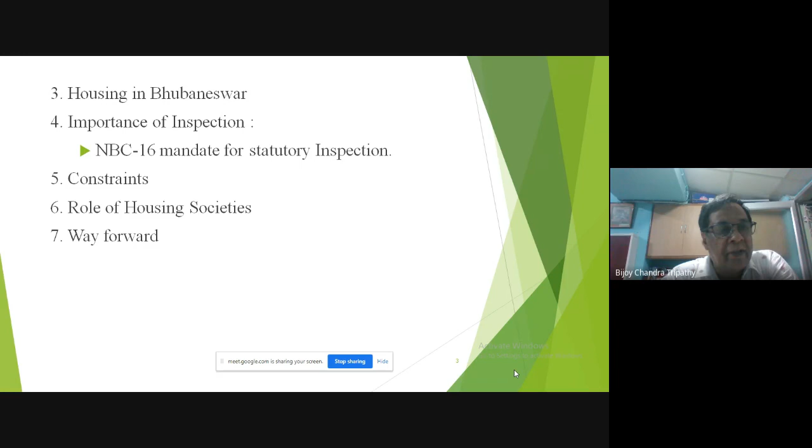We'll go one by one through the concept of the smart city and the strategy. My sequence is like this: the challenges, importance, need, features, aim, strategy, and implementation. Then we'll come to Bhubaneswar Smart City Limited, its broad coverage, board and institution. Next, housing in Bhubaneswar, importance of inspection, constraints, role of societies, and way forward.

As per the mission statement, smart cities are cities that work. Here both push and pull factors work - people who don't have opportunities come here, and people who think there are opportunities also come here, so it's a both-way process. The needs of people who live in cities are livability, economic ability, and sustainability.

As Mr. Dalai said, urban population is rising, and along with that it is contributing to GDP. So towns, urban areas, cities are the sources of GDP now. In the 2030 scenario, 40% urban population will contribute 75% of GDP. Smart cities are important because this is the first organized step for promoting comprehensive and integrated development of infrastructure - physical, institutional, social, and economic.

Smart cities need smart leadership and vision, understanding the concepts of retrofitting, redevelopment, and greenfield development, because we are developing smart cities out of existing cities. Smart planning is entirely different from the routine DPR concept that we engineers follow in debates. Smart citizens actively participate in governance and reforms - this is the underlying point. We've been talking about stakeholders for whom we are preparing smart cities - it is for the citizens, and citizens must be sensitized enough to live in the smart city, understanding the concepts, strategy, missions, time period, and what is expected from them.

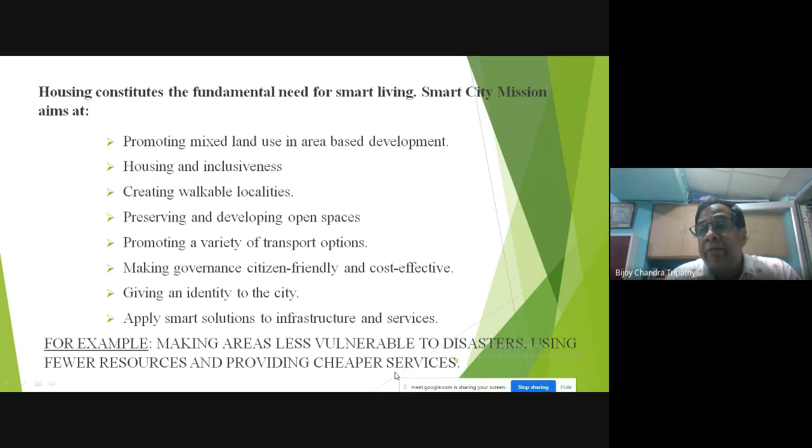For example, making areas less vulnerable to disasters, using fewer resources, and providing cheaper services. We'll be hearing from my colleague Mr. Parhi on the effect of storms on stormwater drainage later on, and there are other disasters which I am going to highlight here. The smart city strategy is to drive economic growth and improve the quality of life.

All these are the mission statements; I have only borrowed from their statements. Retrofit the existing areas, including slums, so that they contribute to smart city development. Develop greenfield areas - there are other areas where we can develop all around the city. The implementation, as has been highlighted earlier, involves area-based development and pan-city development.

Now coming back to Bhubaneswar Smart City Limited, the area-based development, which was referred to by Mr. Dalai, is focused on Janpath, that is 985 acres, BBSR Town Center District, BTCD.

Then development of Intelligent City Operations and Management Center, IOMC, or the Pan City Tech Intervention, which covers the whole city. Social equity and capacity building projects in the selected BTCD area. Among other facilities, the Pan City proposal includes city service, water, waste and energy, traffic management, emergency response incident management, plug-in services, fiber optic cable, and Wi-Fi access points.

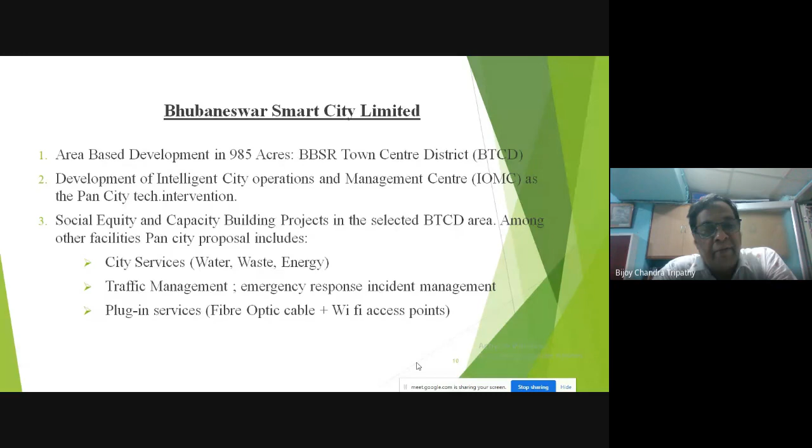Now we'll come to our topic. Against the backdrop of smart city, we look at the housing scenario because smart cities need smart citizens, and smart citizens live in different houses. What are the categories of housing facilities in Bhubaneswar?

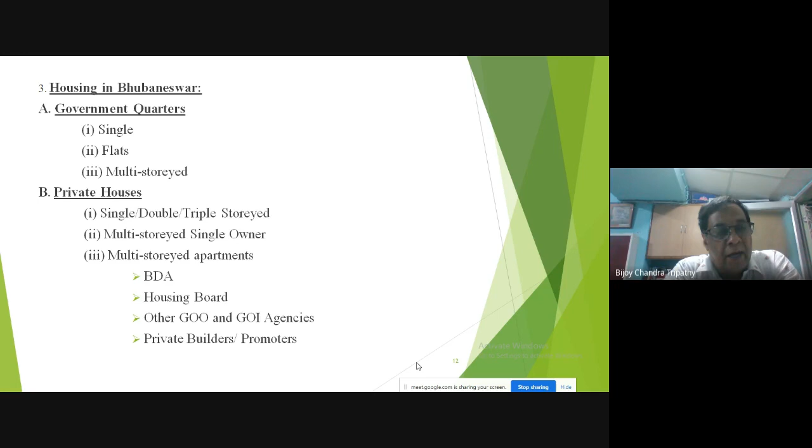Apart from the slums, different slums, we have organized housing through government quarters, single flats or multi-story, private houses - single, double, duplex, whatever it is called, triple story, multi-story, single owner, multi-story apartments. Some of them are built by government agencies and some by private builders and promoters.

From the 1950s onwards, it was mostly government housing. From the 1990s onwards, mostly private multi-story apartments. Earlier, from the 1990s to 2010, we had ground plus six, seven stories maximum, and then the rules changed, and we had buildings of 15 to 20 stories.

This came up with Cosmopolis, with builders and others. Regulatory authorities include BDA, the Apex one, BMC the municipal services, OSPCB for environmental protection, groundwater board, fire department, Government of Odisha for fire safety and life safety, AAI for airport funnel zone, ASI for heritage zone, and WRD for natural drainage.

That is a very important one, and I think my colleague Mr. Parhi will touch upon this. As I gather from my colleague, the town planner Mr. Namani, there are 107 private multi-story apartments existing now, apart from the ones which have been approved recently.

They resumed approving after the RERA rules in 2020. I attended a couple of meetings in BDA at that time also, and there are government apartments, multi-story, numbering 17.

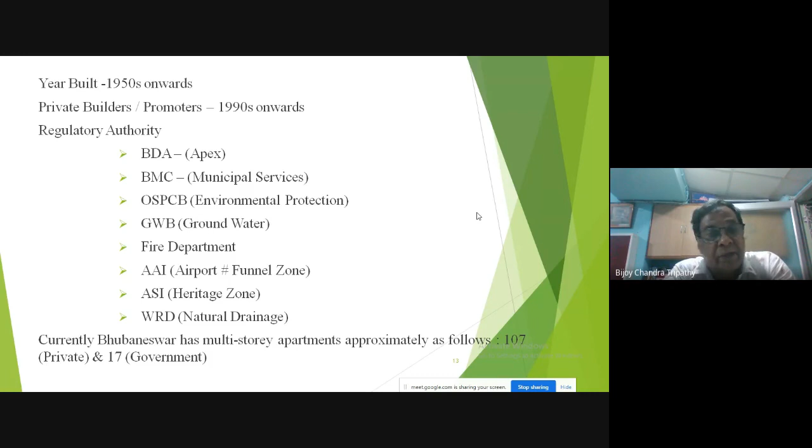And now, why it is important - the topic which I have selected is the importance and necessity of regular inspection for safety: structural safety, fire safety, and other life safety.

The National Building Code was revised in 2005, emphasizing an integrated approach to planning and administration, a multidisciplinary approach. It has been further refined in its latest version, 2016. Safety provisions have been modified and updated as per the respective revised codes, because there are material codes, structural codes, administration codes, and fire safety codes, and all have been revised.

So these codes have been incorporated. Apartments which are not built in conformity to these are at the highest risk. Bhubaneswar, as we know, is in earthquake zone 3, and earthquake is unpredictable, and soft, open ground floors are most vulnerable. So also apartments constructed on filled-up soils without deep foundation.

I am writing this because I have personal experience, as I have grown with the city and have been involved in my honorary capacity as a structural engineer in some of the construction that came up. Out of my own interest, I saw it from the 1990s, as Bhubaneswar faced the impacts of the super cyclone in 1999, ripping through buildings. Non-structural components were damaged heavily, and structural components were also damaged.

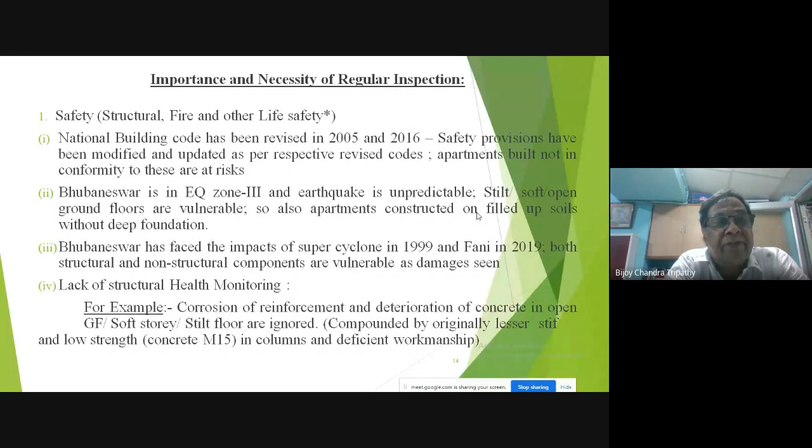Our population is at risk, and that is the urgency of the matter. I am trying to put it across the board for consideration. Next, please. Nita, next, please.

Modification by individual apartment owners - as they have lived there for 10 years, 20 years, they have been modifying things. RCC structural members have been tampered with, cut by electrical and plumbing work or for refurbishing purposes without consideration of the structural aspects, stability aspects, updated codes, and floors have been redone over existing floors.

What will happen if you put grouting and put a floor over the existing floor? It will add to the weight. It will add to the gravity load and the component of lateral load due to the earthquake component.

Additional partitions, wall additions on cantilevers - this is a risky thing. The cantilever balconies are the most vulnerable, with many times more seismic coefficient, and they are adding walls, adding loads there on the edge.

Then modification of occupancy - residences were designed originally, and they are changing them to hospitals. I have got one such example in Sunshine Hospital, which was originally, I remember, part commercial in 2 floors, and now the entire thing is a hospital, and huge loading has been done over there.

Unauthorized penthouse construction on terraces by the builders themselves - promoters who have violated the laws. One of the main things you see is fire fighting fire escape routes blocked, non-provision and non-functioning of the firefighting facilities as per norms, non-existing refuge or assembly areas, non-practice of mock drills, and obsolete and unsafe electrical installations.

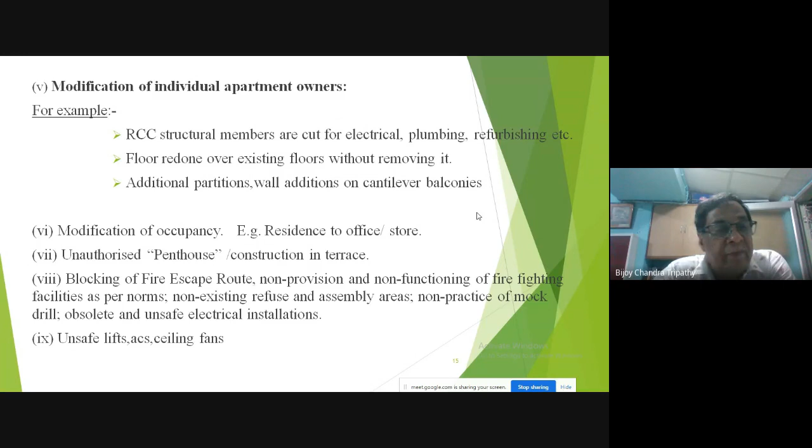The window air conditioners will be running for more than 8 hours in the night because of summer, and it is risky. One person is vulnerable, and the entire flats, the entire apartment, become vulnerable - unsafe lifts, air conditioning, and ceiling fans. Next, please.

Sustainability, yes - the second point, why it is important. Obsolete electrical installations - now we are advocating for energy efficiency, energy efficient installations, and energy efficient pumps and motors. Non-use of non-conventional energy - nowadays we are making it mandatory to have a certain percentage of solar and other non-conventional energy, and this was not used then.

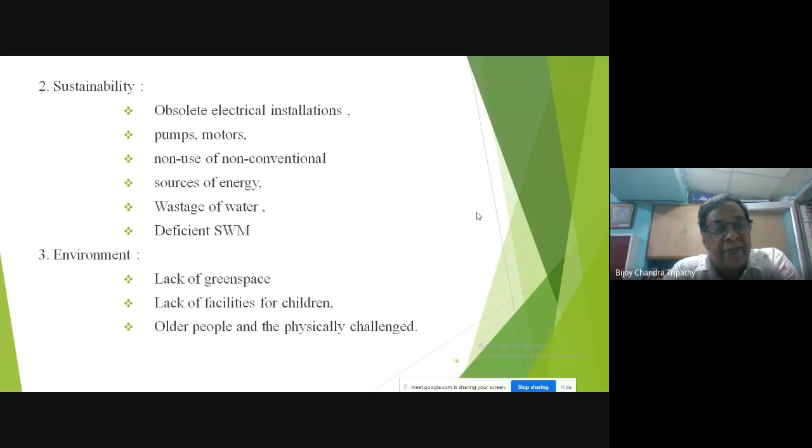So when we are talking about smart city and sustainable architecture, we have to retrofit for sustainable energy as well, and address wastage of water and efficient solid waste management. The Bhubaneswar Municipal Corporation has taken adequate steps and introduced door-to-door collection, but in housing societies things need to be streamlined - that is not done. Environment-wise, there is a lack of green space, lack of facilities for children, older people, and physically challenged.

Next, please. What is the mandate of NBC 16, which is supposed to be enforced by the development authorities? Part 14.4, periodic occupancy renewal - buildings more than 15 meters in height must be subjected to periodic physical inspection by a team of multidisciplinary professionals of the local authority.

In this case, we are talking about BDA. The period of inspection shall not exceed 5 years. Professionals can be outsourced also. Inspection includes, among other components, structural audit, fire and life safety audit.

Now the most important point comes on the next page. NBC mandate part 2 continued. Unsafe buildings: by such inspection, they identify all unsafe buildings which constitute danger to public safety and shall be restored. Underline this: shall be restored by repairs, or demolished, or dealt with as otherwise directed by the authority.

So if the builder, if the housing society does not do it, BDA has a mandate as per the code. It is not that the law is enacted, it is not there in any regulations, but this is an important facet because life is at risk. We are talking about smart city, and this is supposed to be smart people vulnerable to the condition of the building. Structural health is poor, and this is mandated by the code, and is the recent code.

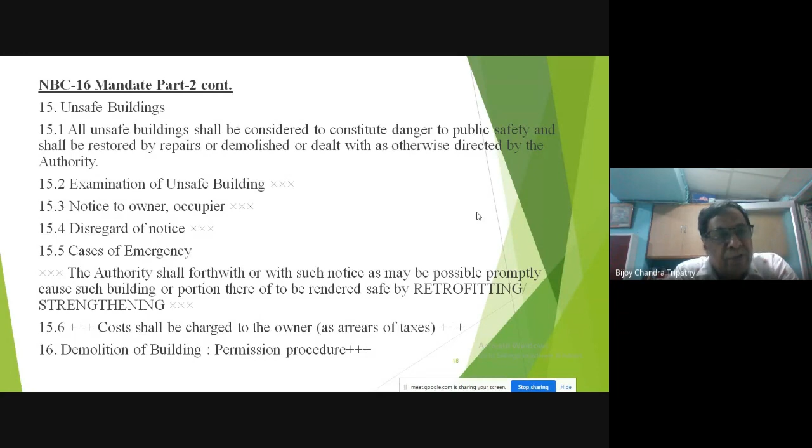Current practice for inspection by BDA - again I got it from BDA. I gathered from my friend, my colleague, Mr. Acharya, who was the architect in BDA, that he used to accompany the team, and that practice has been stopped. But now what is happening, let us see: pre-approval stage, site verification by Amin, field inspector, all of us know that, after application for approval or occupancy is submitted.

Existing building and construction phase: what is happening in case of any complaint by the neighbor or outsider, site verification is taken up related to land or building either by planning or enforcement. If deviation is detected, the applicant is notified as per ODA or BDA regulation. The owner applies for regularization within the rules. After RERA registration, BDA records reduced number of deviation cases.

Bhubaneswar Land Use Intelligence System - this is an IT-enabled service. BLUIS is now set to be in operation for detecting encroachment and inspection over government land from ISRO satellite by ORSAC.

Multidisciplinary inspection is not active now. As I said, structural safety - in BDA's view - is the responsibility of the developer and structural engineer who are certified and engaged for the project. Fire safety is guided by recommendations of the fire prevention wing, and it is on the basis of incident reporting only. And in essence, the safety is the responsibility of the builder.

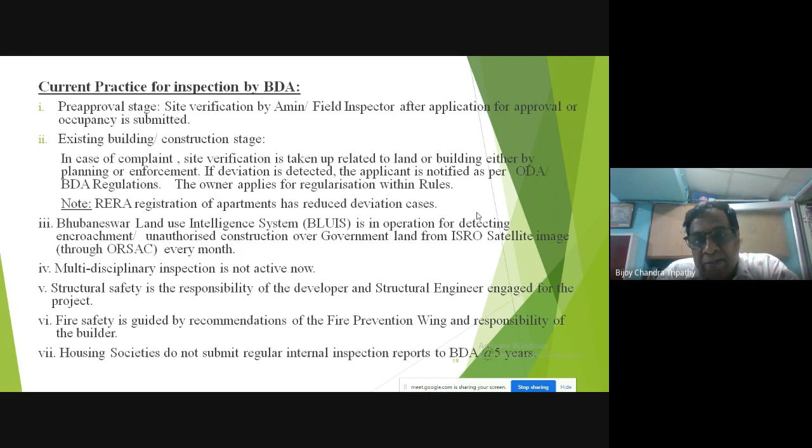Housing societies do not submit regular internal inspection - they do not inspect it. And they just plaster it and paint it if required. And in some cases now it is also exposed, as I said, in most of the stilt floors.

What are the constraints in BDA? BDA does not have its own structural, geotechnical, HVAC, plumbing, and electrical experts for inspection. Housing societies are to take care themselves. Housing societies mostly do not have as-built drawings and records of execution, which is the best document for any kind of special repairs or retrofitting.

Housing societies are mostly concerned with operation and maintenance and routine maintenance. That too, maintenance is mostly taken up in an ad hoc manner, and a plan approach is missing. Housing societies often shirk the action of retrofitting, even in emergency, on the plea of cost and non-cooperation by the members. Level of sensitization is too low.

So we are at peril. The risk continues. Ignoring the problem does not solve the problem - it compounds the problem. And every year, I would say that the rate of deterioration is increasing twice.

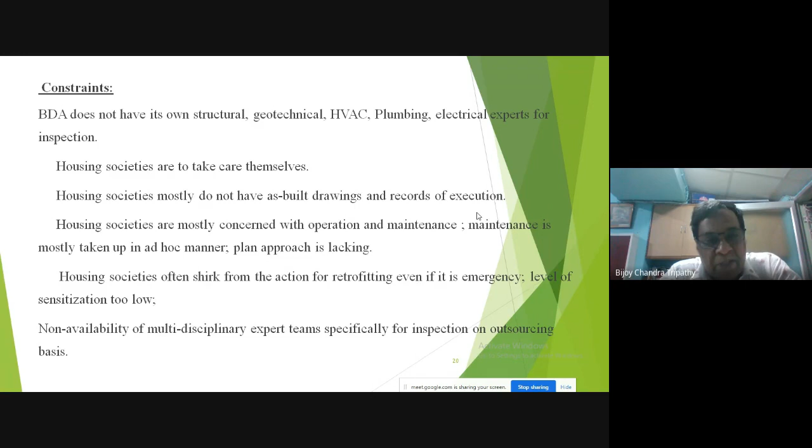Non-availability of multidisciplinary expert teams specifically for inspection on an outsourcing basis - such consultants are not available. Our consultants are there to prepare the DPR, detailed engineering, structural engineering, but a multidisciplinary team for the sake of such kind of inspection has not been advocated, and that is the need now.

Role of housing societies - so now we come to the stakeholders. The main stakeholder in a smart city are the housing societies. Housing societies need to be smart, fully IT-enabled, professionally advised by an in-house team or outsourced team of experts. We have seen in Mumbai, in NRI colonies, such kind of IT-enabled smart housing societies existing. I think 3 to 4 years back, I was there for a couple of weeks on a personal visit.

So I had seen that, interacted. Awareness among individuals on life of structure, structural and non-structural components, do's and don'ts for structural, fire and life safety.

And this third point is very important. We have highlighted awareness on collective failure for an individual's lapses, be it air conditioning, gas leakage, or wastewater, or sensitization of maintenance. That is very important because an individual's lapses compound to total system failure.

So here the sensitization of maintenance staff, the electrician who goes there, must be told about the importance of a column or structure, and he should not cut it. I have seen with my own eyes, I caught it and shouted at him, but he said, no sir, everywhere I have gone, nothing is there. The structure is safe, we plaster it, there is no problem.

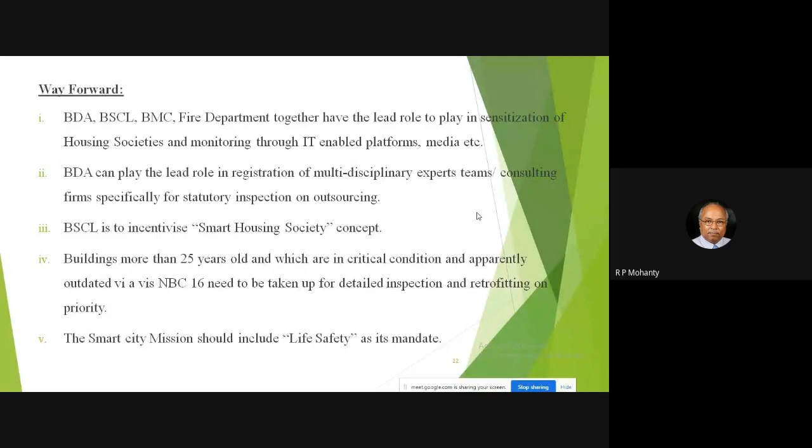Buildings more than 25 years old, and this is most important which comes from our discussion, which are in critical condition and apparently outdated vis-a-vis NBC 16, need to be taken up for detailed inspection on priority. And the smart city mission should include life safety as its mandate.

Thank you very much. And I have along with me some 5-6 research scholars.

Thank you very much, sir, for your excellent presentation on the topic. But I shall just add one line that it is very important for the government to take responsibility for the government buildings at least, for how these buildings can be preserved. But now we observe very little response from the government side, at least for government buildings. Anyway, all the stakeholders have important and equal responsibility. I'm mobilizing a lot of people in different ways.

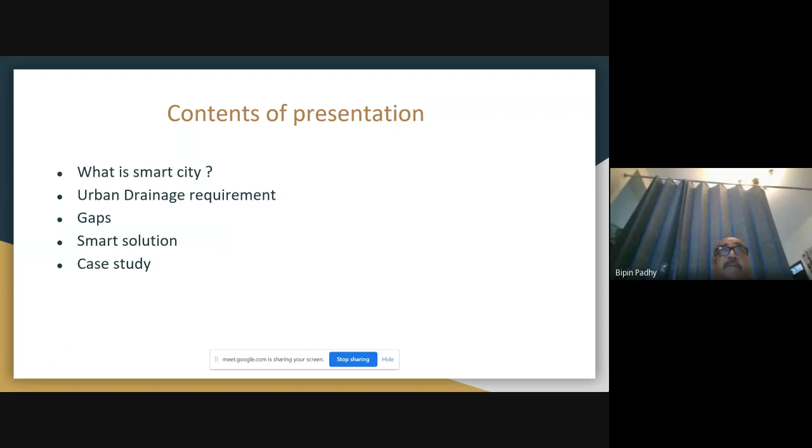If time permits, I may go for Bhubaneswar town. A smart city, of course, is the call of the day, and Mr. Tripathi has already elaborated, and our previous speaker, Dr. Dalai, also has spoken about the smart city requirement - adequate water supply, electricity supply, sanitation, etc. All this gamut of things comes under the smart city category.

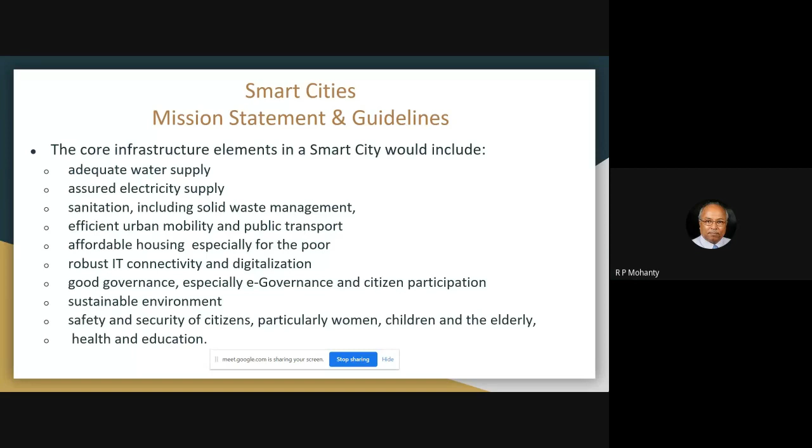Mostly what we perceive, smart city is nothing but digitization. When you go to the parking lot, you find information on your mobile. And when you've got an IBMS system integrated into your building management systems, automatically you are aware of many of the operations. So these are all smart solutions.

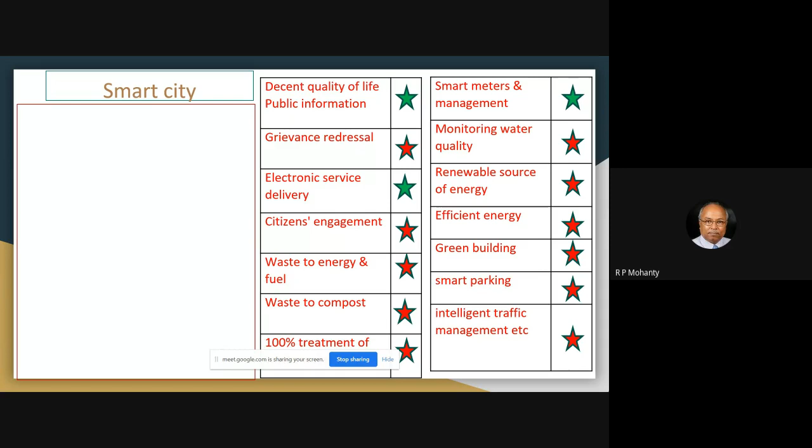Now, what is smart city? It's a decent quality of life, public information, it's a grievance redressal, electronic service delivery - this is all taken from guidelines where it's specified what a smart city should have.

If you see electronic service delivery, citizens engagement, waste to energy and fuel - I had purposefully marked something red and something in green, just to show that many of the things we are having are under development: smart meters and management, monitoring water quality, renewable sources of energy, efficient energy, green building, smart parking. All are there in part of our life, and slowly it is coming in.

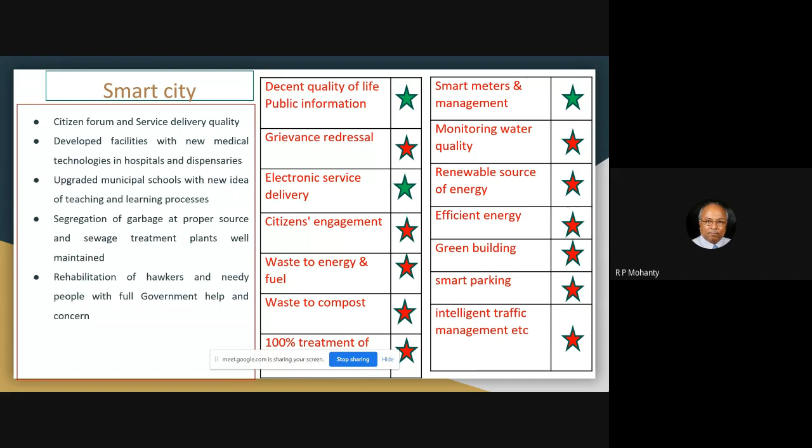Smart city citizen forum and service delivery has developed facilities, segregation of garbage. Let me come down to the last point, which I'll try to go to the topic directly.

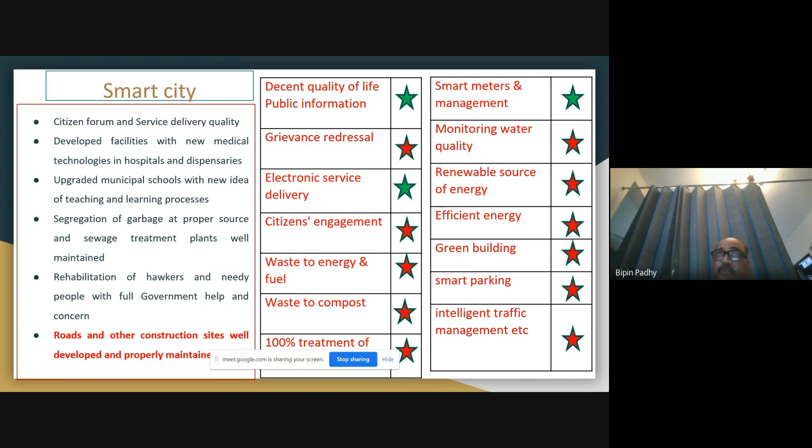Roads and other construction sites should be well developed when seeking smart solutions. If my roads are there and roads are flooding and I'm not able to even move out, that means basic infrastructure is lagging in my city. I need to address them first. That is important. Now coming down to stormwater drainage.

Stormwater drainage is part of the jigsaw puzzle of this particular smart city. In a smart city, if you look into the treatment side, the solid waste management, the wastewater collection, the household collections, and stormwater drainage - these four are part of the entire integrated system of environmental management. If this needs to be here, I can search for smart solutions.

For example, if I'm going for wastewater collection and disposal, I may go for an STP and reuse the water. If I'm going for solid waste management, I may take out compost and reuse this. This means everywhere I'll try to integrate some of these smart solutions. So in the stormwater drainage system also there are some smart solutions.

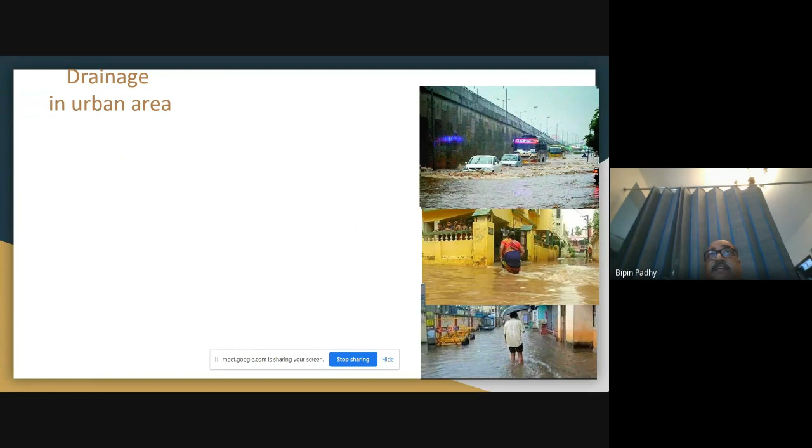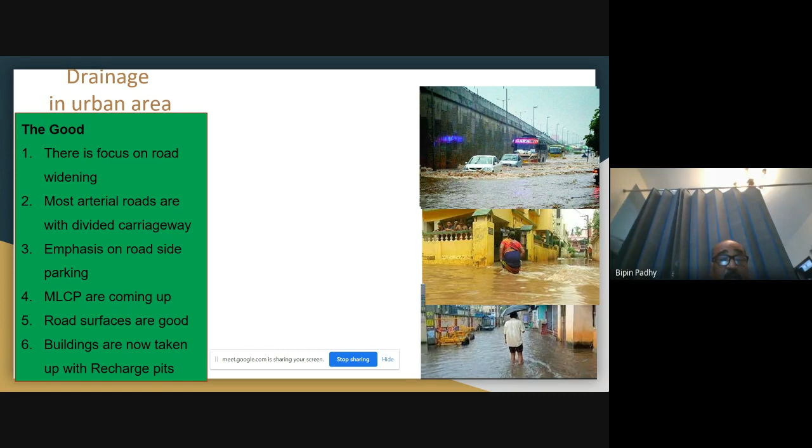So talking about the good, bad and ugly phases of the city - nowadays there's a focus on road widening. Most arterial roads have divided carriageways, with emphasis on roadside parking. MLCPs are coming up, and you'll find Bhubaneswar city has taken a bit of an uplift in its look. Road surfaces are good, and buildings are now taken up with recharge pits and other smart solutions.

Now the bad part - very few know about sustainable urban drainage systems. There's improper roadside drainage or no drains at all, with no control on invert level. Sometimes the road goes in a gradient, but you find the depth of the drain at the topmost level or the start of the stormwater drainage and catchment level is the same as at the discharge point. So there's no control in invert levels.

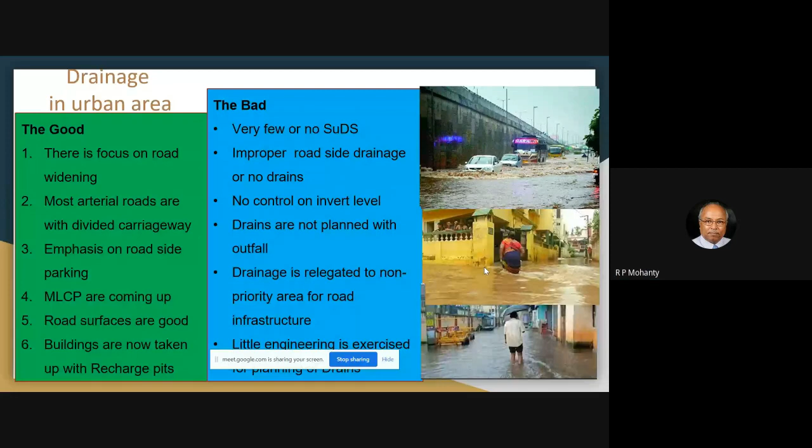Drains are not planned with proper outfall. Drainage is relegated to a non-priority area of road infrastructure. Sometimes we compromise on cost, and we end up compromising the drain. That's another part. And mostly, the scary part is we do not calculate the stormwater drainage discharge extent that the drain is likely to withstand. We simply say provide a 1 meter by 1 meter or 1.6 by 0.6 meter drain, without doing a catchment analysis. There is very little engineering in this exercise.

And the ugly scene - everybody witnesses this ugly scene. This is the result we get when we do not follow the appropriate drainage system.

The causes of urban flooding - I need not read out all these things, but there are some important points. For example, high rainfall intensity is now varying because of global warming and changes in the demography of the city. We also find that stormwater drainages are currently designed for rainfall intensity of a 2-year return period. That's what the code says, and the CPHEEO manual also talks about this.

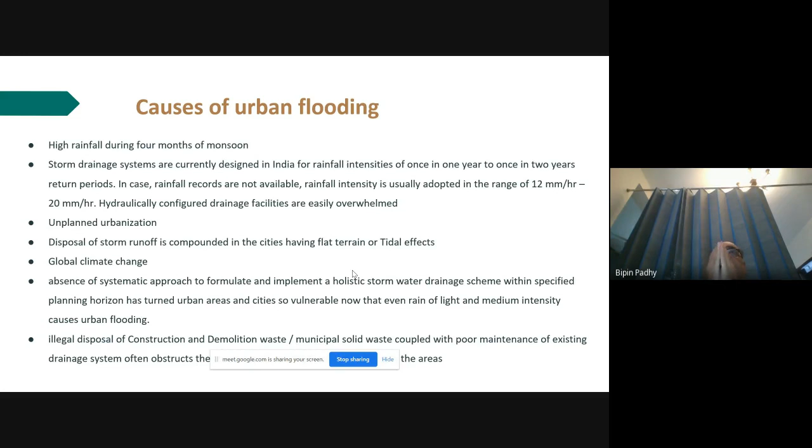The next part is unplanned urbanization - I'll come to a small example after this slide, where I'll try to say our planners should look into how they should plan the drains. Disposal of storm runoff is compounded in cities having flat terrain and tidal effects, global climate change, and the absence of a systematic approach to formulate and implement a holistic stormwater drainage system. We think that once we've provided a drain, that's the end of it, but that's not really the case. We have not understood urban flooding, and there's also illegal disposal of construction and demolition waste.

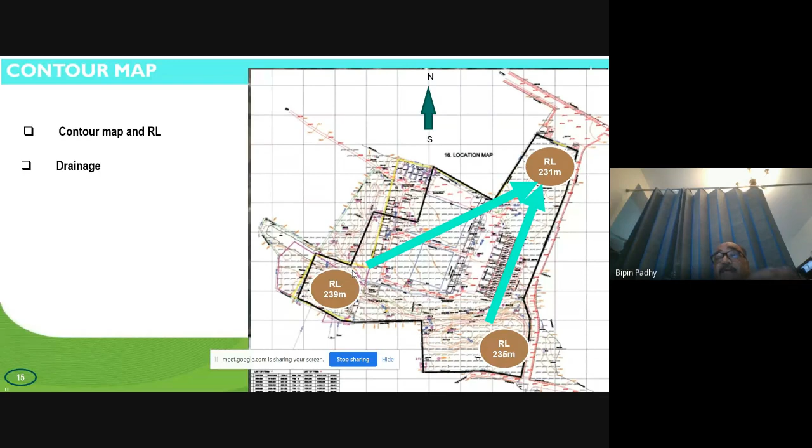In that case, your road should be oriented like this, and all the sub-roads should come accordingly. You may not have an angular road, so you may go for something like this, so that towards the outfall point your roads are parallel, and you have a collector drain along the contour. But here, irrespective of the terrain conditions, we have our arterial roads, and that's why water gets stagnated because of the contour-sort drain - we are not providing a gradient drain, we are providing contour drains.

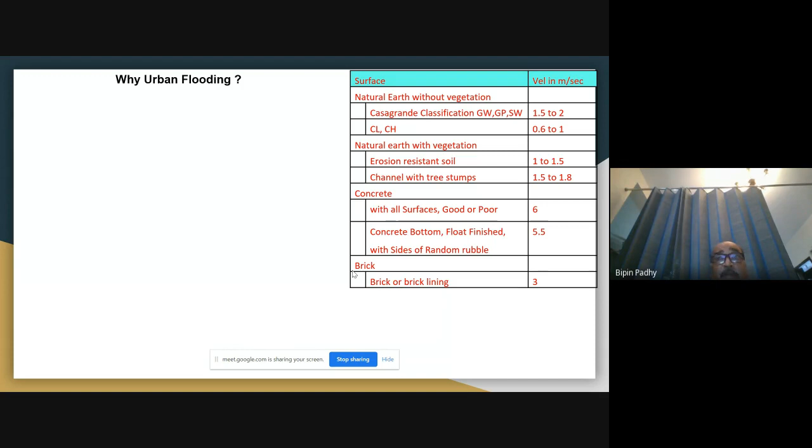Urban flooding - to give an example, as Mr. Tripathi was saying, natural drainage has to be given importance whenever you plan something in an urban area. Now think about India, Odisha, think about Bhubaneswar.

In Bhubaneswar, if you go back 30, 40, or 50 years, maybe about 80 years back, Bhubaneswar was a small city of maybe 10,000 to 20,000 people, with a few kasbas or hamlets in Old Town, Bargad, and Lakshmi Sagar - these were small villages. There were 11 natural streams flowing through this area, discharging into the river or the Gangua Nala. Now what happened was these drains were actually in a regime.

There was a terrain available with forest, agricultural activities, and all sorts of drainage. The water was coming through those particular catchments to the drain, and the drains have created a regime section depending on that particular flow. That flow was existing since time immemorial, maybe 10,000 years back.

Presently, the drains are there, the capacity is the same, but we have changed the demography, the terrain, the topography. Whatever my discharge coefficient was previously, it was probably 0.1 or 0.2 maximum. Now, constructing roads, buildings, with more populated areas, we have increased it, say the coefficient is 0.6. That means the discharge from this catchment has increased sixfold. But the drains remain the same.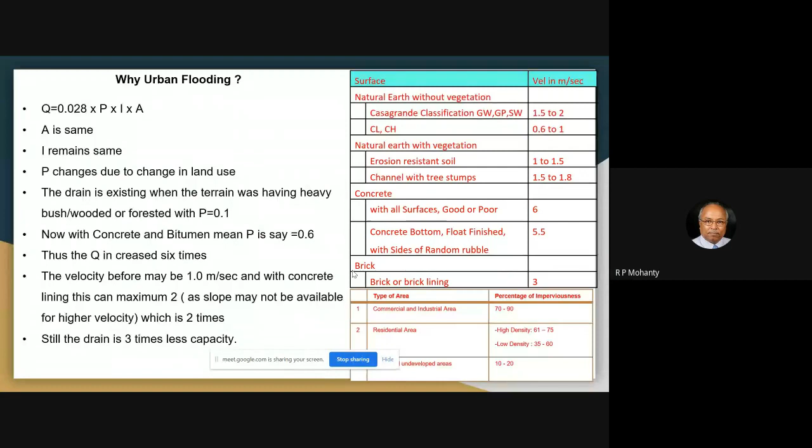Previously, the drain was an earthen drain, the stream was an earthen stream. Now we are making it, say, a rectangular concrete section. In that case, I may increase the velocity by 1 meter per second. But in any case, for the same catchment, changing the characteristics, suddenly our drains are under stress, so there is always overflow.

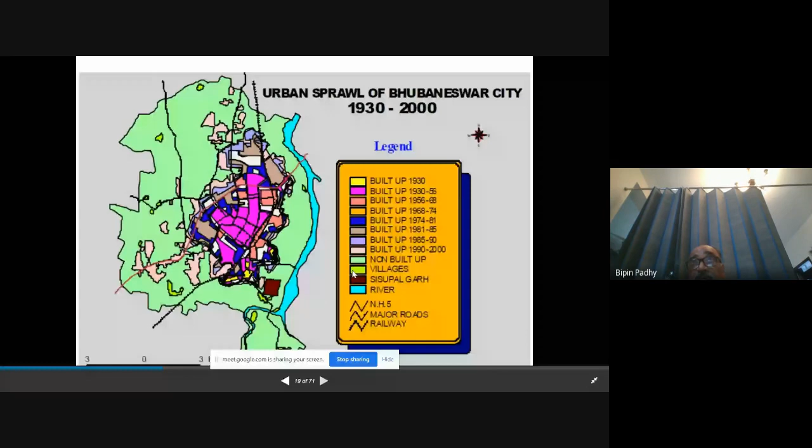If you look at the Bhubaneswar town color code, you can witness from 1930 to 2000 how this town has grown. Beyond 2000 I did not get data, but probably it is almost as good as the entire area being full because of the Cuttack-Bhubaneswar greater comprehensive development plan. As this built-up area increases, the drainage problem increases.

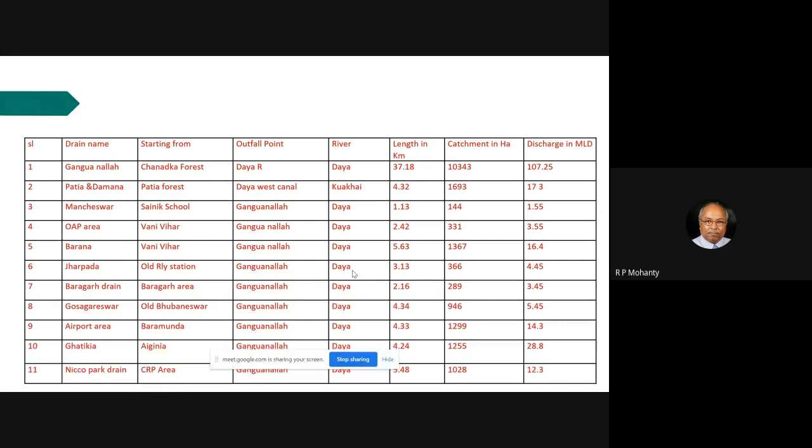These are the 11 natural drainages in Bhubaneswar. Now, some reasons for urban flooding - even if that particular drain is there, in one particular place near the downstream of Iskab, we found the drain itself is about 3 to 3.5 meters, but in one particular place the drain goes like this.

Imagine, this is our tendency - we don't even allow the drainage properly. So there's a large increase in concrete impervious surfaces. What are the reasons then? Unplanned usage of urban land, lack of proper drainage, loss of wetlands, loss of groundwater usage, tidal effects - maybe tidal effect not here, maybe in a place like Puri.

Very heavy storms, encroachments, and narrowing of natural drains. Another point we were marking there - if you see during a heavy deluge coming down, even in Janpath or many of the main roads, you find the water flows along the road. Even if there is a roadside drain available, we do not have sufficient entry points into the drain. So in some places, if you try to take out the cover, you will find the drain is running dry and the road is running full.

What I mean is that when we design the stormwater drain, the entry points are also designed based on how much the road is taking or how much the catchment is taking. That's why we have to improve the inlets of the existing drain to utilize whatever little drain we actually have.

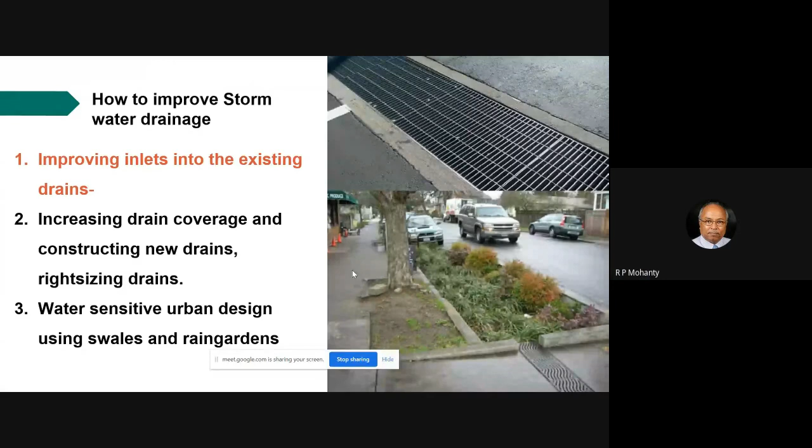Second thing, we have to increase the drain coverage. We are now allowing the water to flow on the roads, etc. There isn't a systematic flow entry, and we have to construct some new drains and right-size existing drains in some places. Third, and more important, we should go for a smart solution - physical drains will be there, but we should also go for smart solutions. We'll talk about this a little when it comes to that.

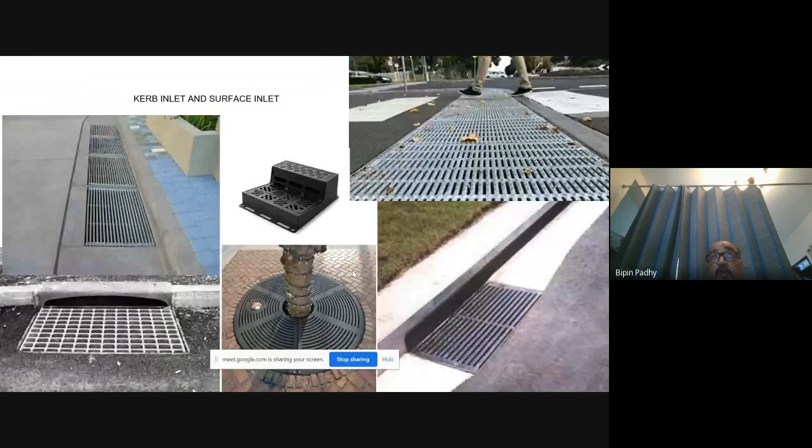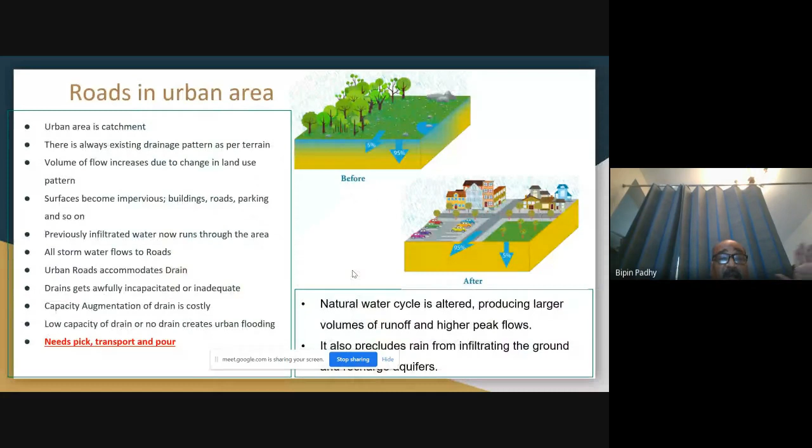So these are some of the things where we allow this water to enter into the drain - even at each tree side, we should have a sort of grillage arrangement where we allow the water to percolate. So, roads in urban areas, I'm not going to...

So, urban drainage design considerations - a few days back we were taking up an analysis in Bhubaneswar town just to see how this rainfall intensity varies within the town itself. The geographical area has increased manifold, and what we found is there is rainfall in some places and no rainfall in other places. So a particular catchment experiences rainfall while the other catchment does not have that.

When we design, we should talk about the type of drain. We should also look into the frequency of thunderstorms, rainfall, peak flow rates, design flow, and the design should involve hydrologic analysis and design, and adequate sizing and design of conveyance.

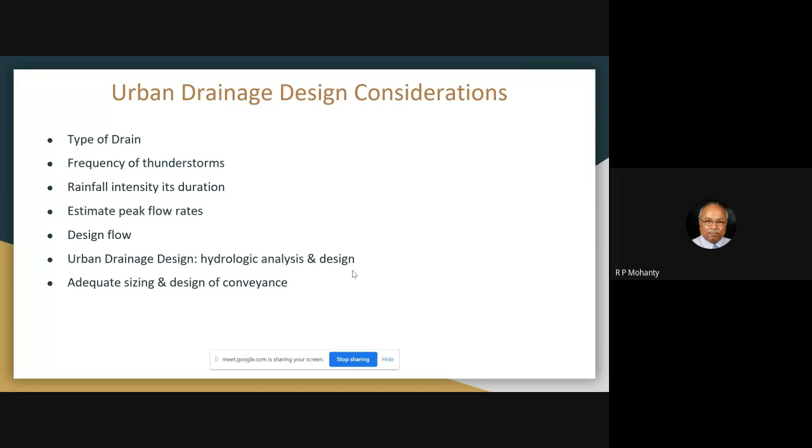The design problems arise from increasing rainfall intensities. Rainfall intensity used for design will also depend on the time of consideration.

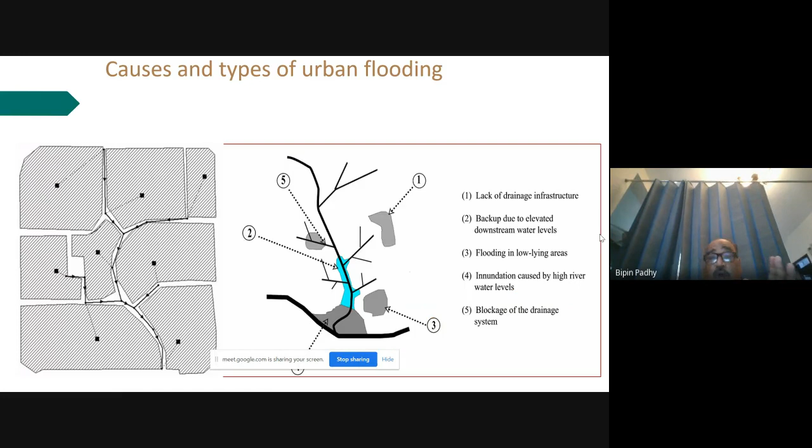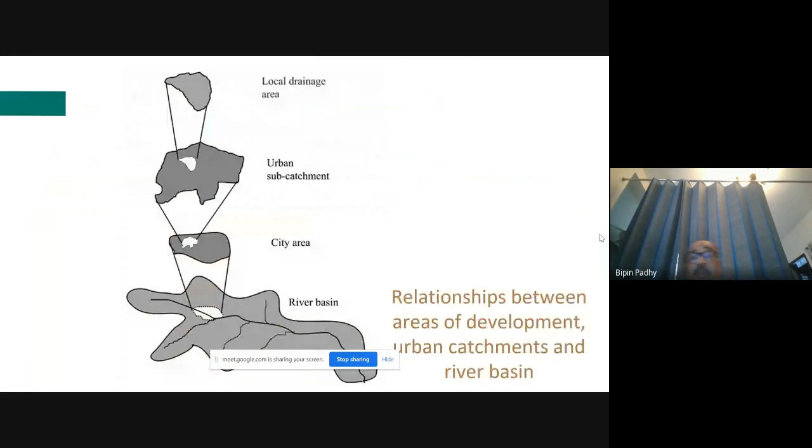So you have to estimate basically how much water you are getting to the discharge locations.

Another point, while taking up design, I'm only touching the salient points. The minimum velocity should be 0.6 meter per second to have a non-scouring, non-silting velocity. But maximum velocity we cannot allow more than 3 meter per second, because beyond that there will be turbulence, and for turbulence in an enclosed drain environment, the flow should also not encroach on the outside lane by more than 1.8.

We have a thinking that whatever rain falls in the city area should be entirely consumed by the drainage. That is also not possible. I cannot design the drain for a rain that will occur 25 years or 50 years ahead, so this is also not possible. We have to be a little pragmatic in our approach.

So I am producing a table here, which you can see in various places. Drains in urban areas are usually designed for 2 years. This is also in our CPHEEO manual. In IRC we have two more codes, IRC SP 42 and IRC SP 50, but they have taken from that.

Moreover, IRC SP 50 is a little confusing, as somewhere they have mentioned it should be designed for 25 years, and somewhere they also mention 1 year.

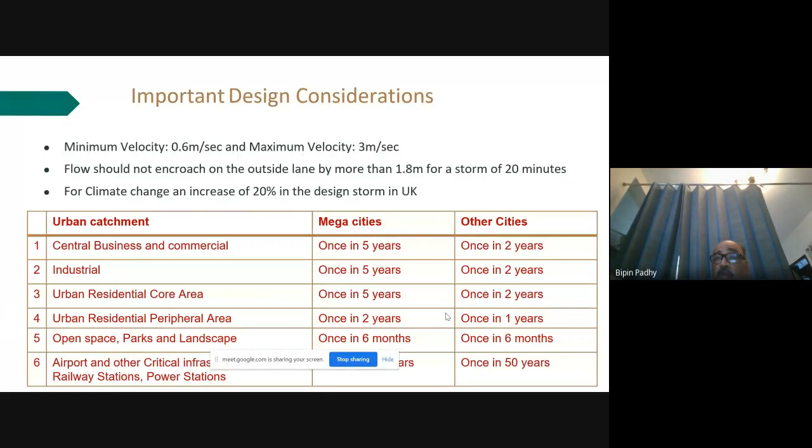Important design considerations are width and depth. The economical depth is width equal to 2 times depth. My slope should be near 0.3%, which is the minimum. If it is too flat, then I go for up to 0.2%. The drain should be designed such that I have a freeboard like this, or depending on the bed width, this should be the freeboard.

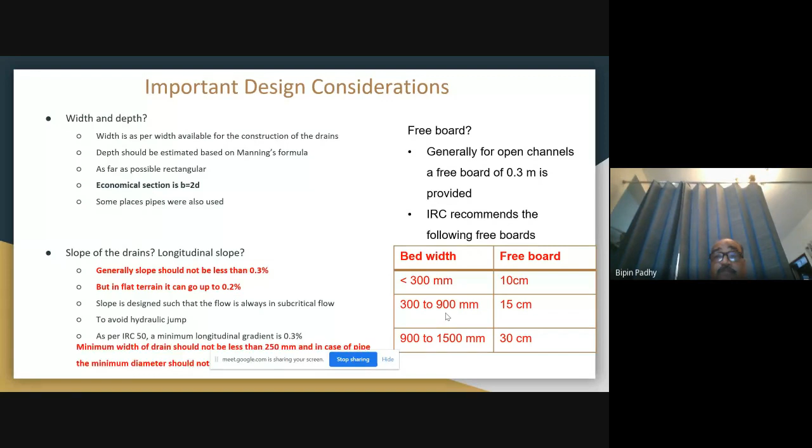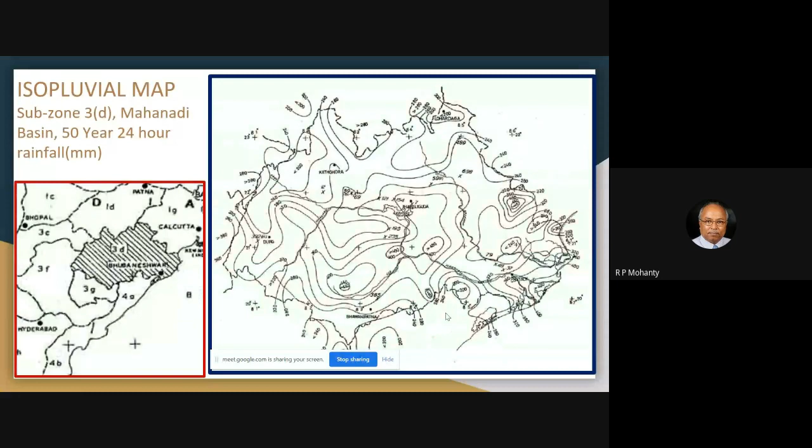Now how are we designing this? What rainfall will we be considering, and why? The CWC has taken up isopluvial maps for 25 year, 50 year, and 100 year rainfall. This map, the isopluvial map, talks about rainfall intensity along the area.

If you look at this, I've tried to produce subzone 3D Mahanadi Basin. This is a 50-year, 24 hour rainfall drawing. You'll find Cuttack, Puri, Chilka, Bhubaneswar somewhere here, Jharsuguda. This covers almost Odisha.

For a 50 years rainfall, let's talk about Puri. I get something about 320 mm, or 300 mm rainfall, and that 300 mm is my 50 years high. I cannot take a 50 years high value; I have to scale it down to 2 years through various design processes and get my design intensity of rainfall.

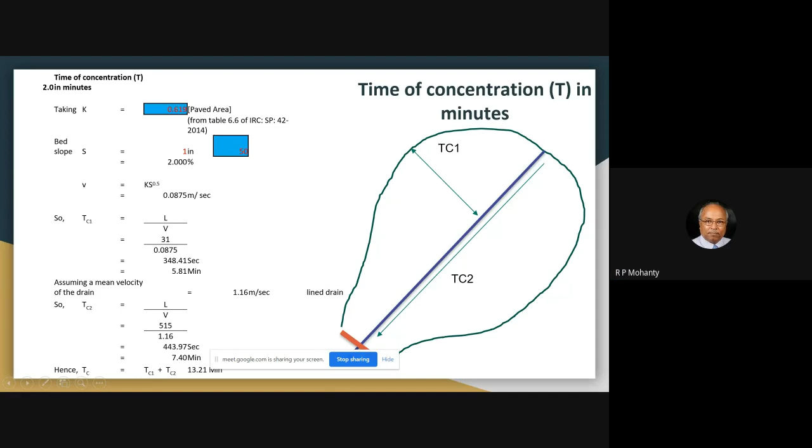I'll not go into the detail of the designs, but I'll say what happens in case of a catchment. This is a road, and I have TC1 and TC2, meaning the time from the extreme end of this catchment for water to travel to the drain, and along the drain the water travels. So at the outfall I must find out how much time it takes to concentrate the rainwater. These are the parts I have to do a little analysis for a particular road.

You may have multiple culverts, different byroads, and within the byroads different roads. So you have to do a catchment analysis as per the land use pattern. For example, near a particular area you may get a big football field, an open area, so there your P value is different. Suppose you have only roads and an arena with a concrete surface, that means the P value is different. From these you calculate how much water will be accumulating.

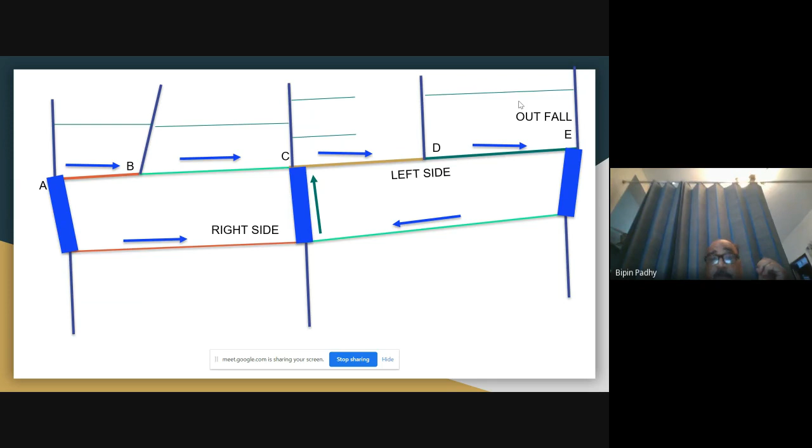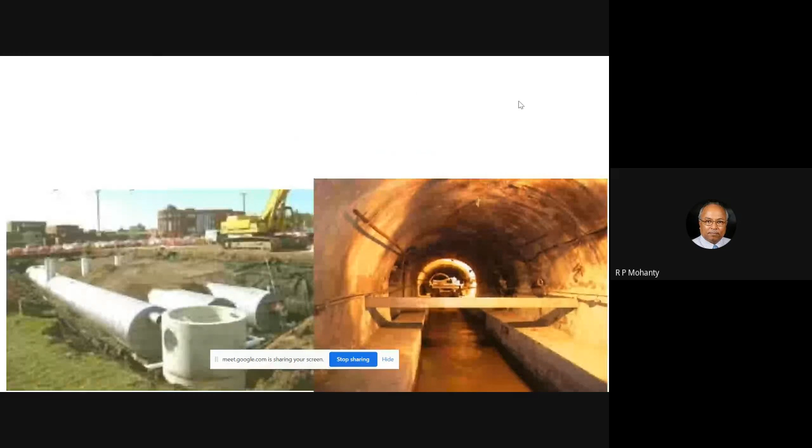Let me go directly to these drains. Now what should be the smart solutions? There are two approaches: the LID approach or the SUDS. The LID approach is called the USA model, where we control the flow, we detain, we go for detention and retention, then filtration, infiltration, and treatment. These are the various things we are adopting now. This is the LID model.

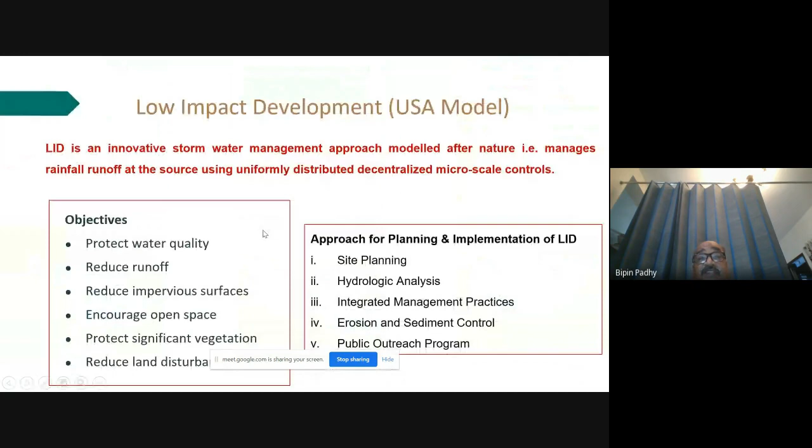Now I'll go for another thing which is very popular worldwide, the sustainable urban drainage system, SUDS. This is basically a UK model, where the models include providing permeable pavement, rain garden, and soakaway.

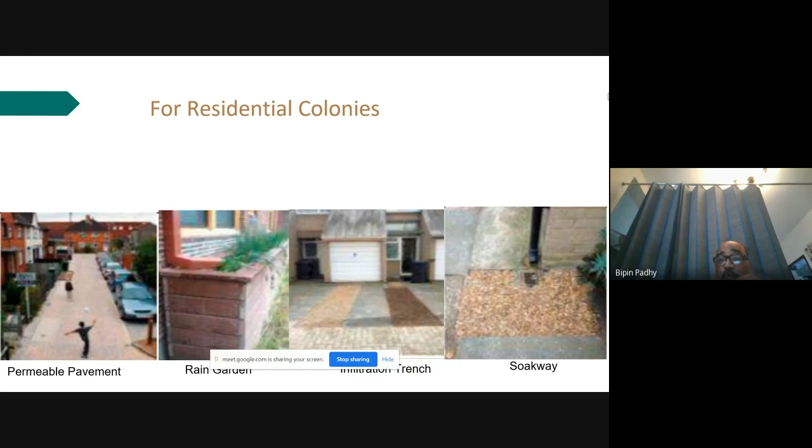So when we design and give permission for a particular building or road, when developing a road, we have to find out where we can have a soakaway, an infiltration trench, or where we should provide permeable pavement. We should not go for concrete pavement which allows all the water to flow. We can go for a rain garden, a rill, a permeable surface, a stone-filled trench.

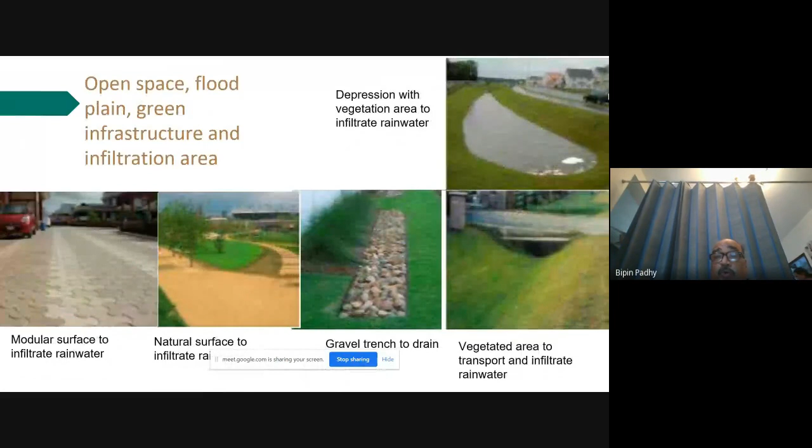So these are all smart solutions. Even for parking, I should not go for parking with only paver blocks. I may go for grass pavers, more permeability so that I can allow the water to soak.

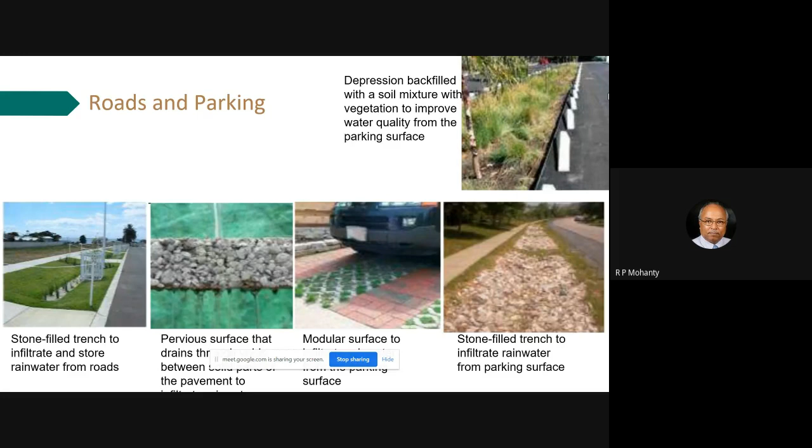These are other spaces where we integrate both systems, having a drain and some arrangement to allow water to percolate through or retain the water for some time, delaying the discharge. So the time of concentration is delayed and my drain performs well. In Western countries, they use football fields and open park areas at the lowest places, allowing flooding there for some time because these are the places where water percolates.

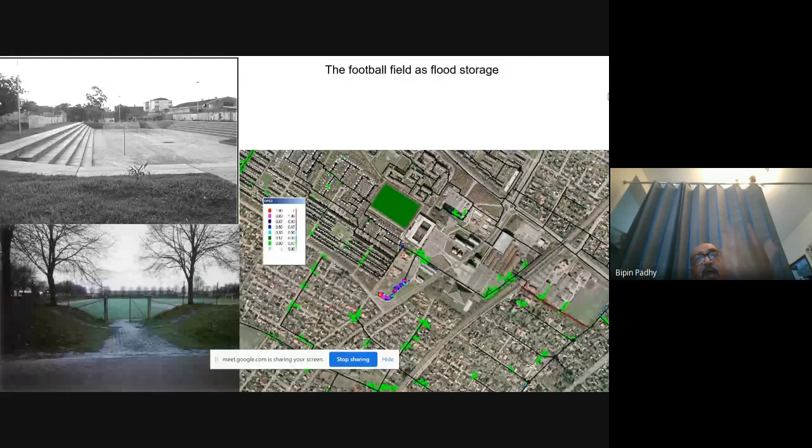Beyond drains, let me go to the way forward directly. All roads, drains, sewerage, and parking should be brought under BMC or one particular administrative body or BDA, whatever is appropriate. In other states, like Ahmedabad, the Ahmedabad Municipal Corporation took up all infrastructure activities within the municipal corporation, and AUDA, the Ahmedabad Urban Development Authority, took care of outside activities. The government should bring all roads, drains, electricity, and water supply into one particular body, so that what we experience nowadays - a road constructed and the next day somebody digs it up - doesn't happen.

The natural width of the major drainage channel in the city should be protected, with a minimum 5 meters on both sides as a no-development zone. Preparation of a policy manual of drainage and sustainable urban drainage is needed. We may have smart city guidelines coming up now for a holistic approach, but we have to take out urban drainage from there and prepare a separate policy manual, which is also available for various states and countries.

Rainfall intensity duration curves are not available. Cities are to be told to maintain these curves. And lastly, a technical committee comprising engineers and hydrologists should come together to work out, on a holistic basis, solutions for this drainage aspect of the urban area. Thank you, sir.

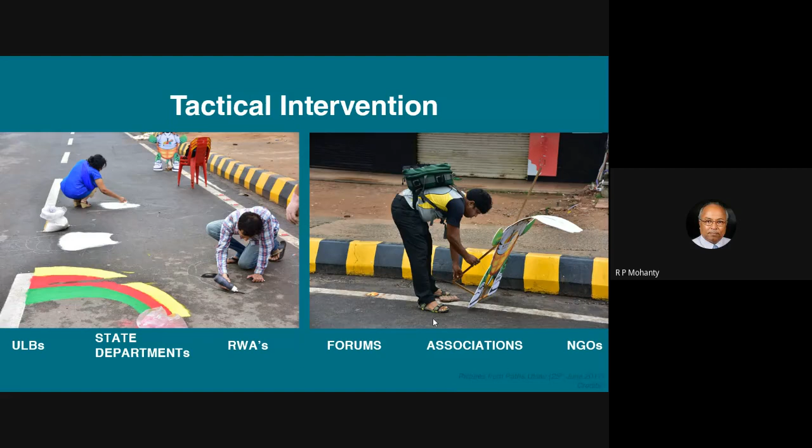Tactical interventions can be defined as short-term commitments as a first step towards long-term change. It is a deliberate, phased approach to instigating change. It can be initiated by a city, an organization, a forum like the Odisha Engineers Forum, or it can be a citizen-led initiative with the aim of neighborhood building using short-term, low-cost, and scalable interventions. A key driving force is to put the onus back on individuals to take responsibility in creating sustainable buildings, streets, neighborhoods, and cities.

What are the advantages of tactical intervention? They expedite implementation of projects since material, manpower, and permission requirements are lesser. They draw local attention to alternatives and shortcomings in both policy and physical design and allow people to physically experience alternate options. They widen public engagement since feedback is expressed through use and demonstrated preferences rather than stated preferences alone. Most importantly, testing interventions before hardscape construction and before making large political or financial investments is one of the key advantages. The iterative design process becomes part of the entire project.

But another thing to be kept in mind is that there is a scope to all these things. A flyover building exercise or a bridge building exercise cannot be a tactical intervention, so even that needs to be identified.

This brings us to the kinds of tactical interventions. They range from sanctioned tactics to unsanctioned tactics, and they could be implemented from the scale of city agencies or state agencies to even local activists, community groups, and artists. The kinds of tactical interventions are varied. I'm sure many of us would have experienced these kinds of interventions in both our national as well as international visits.

Certain examples are parklets to plazas, open streets, pop-up parks which are happening right now, bike parking, and chair bombing, which is very interesting, where within the public realm we place chairs as bombs are placed on a minefield. Now, what are the kinds of materials that could be used in tactical interventions?

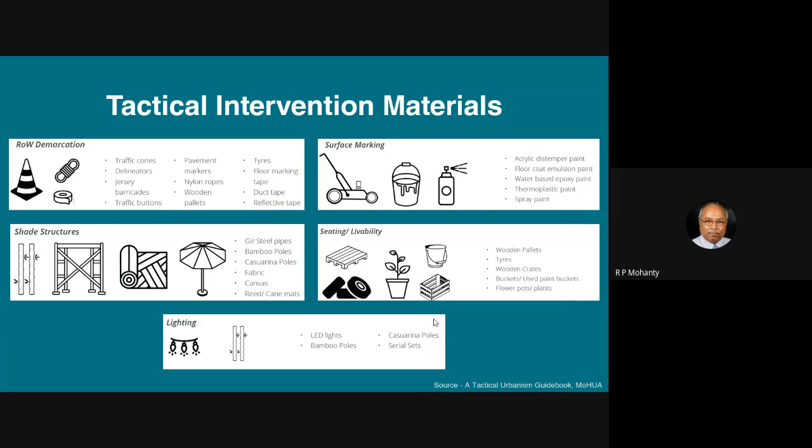These are materials which are easily available. For example, for right of way demarcation, traffic cones could be used. The traffic police of Bhubaneswar have a very interesting take on this - they have steel and bamboo barriers that they use to block off roads or to open roads during shutdown. That is a local flavor that can be given to tactical intervention and implementation in Bhubaneswar.

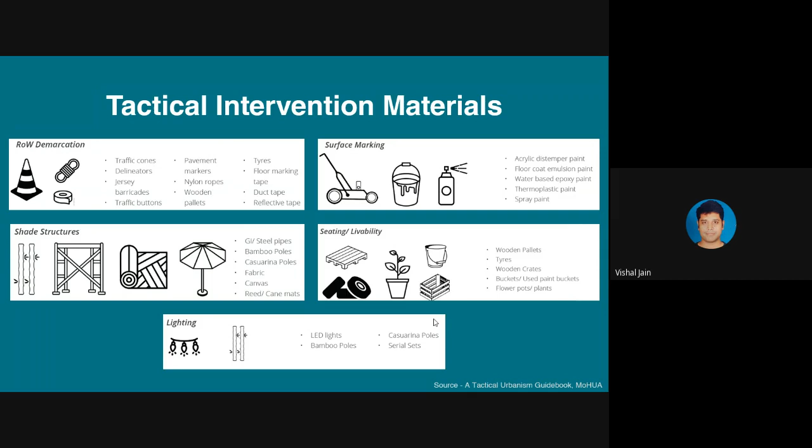Surface marking could be done if we do not want permanent marking, as thermoplastic paints. Temporary marking could be done through distemper and floor coat emulsion so that we can test out designs. Shade structures using temporary interventions of bamboo poles, fabrics, or canvas could be used. Seating and public realm livability could be established through tires, through wooden crates, and lighting could again be done through LED lights or serial sets.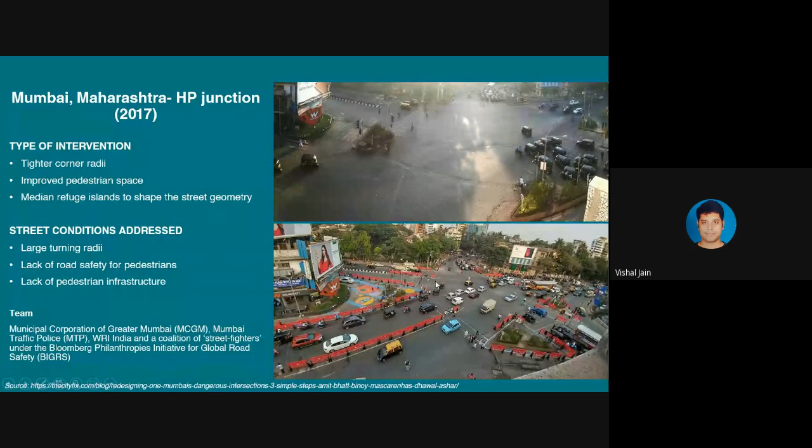Another very good example, which can be seen across media, is the HP junction design. This was the existing condition of the junction prior to the tactical intervention, and what the community as well as the city authorities did was use temporary elements and very temporary road markings to identify and demarcate road user spaces. Based on the user feedback, this is how the junction is functioning at present.

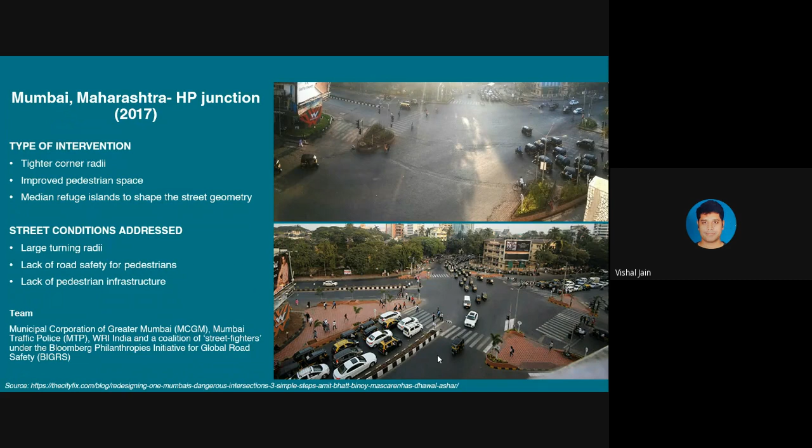So it is a reality which is happening today, and we have been involved in this kind of intervention too. You can see a small clip of Crosscut4Kovai that we did in Coimbatore city in partnership with the city authorities.

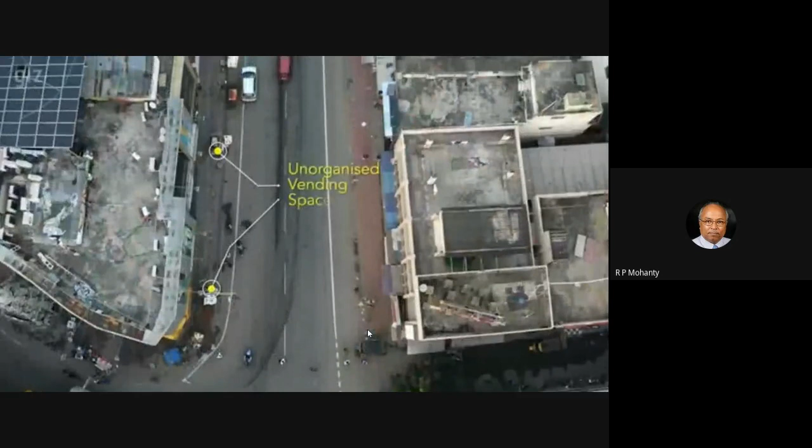It was a 1 kilometer long stretch with more than 25,000 pedestrians, 70 plus street vendors, and a lot of 4-wheelers, 3-wheelers, and 2-wheelers. We identified different on-ground activities and issues that were present, just to assess what are the positives, what are the negatives, and how we can build upon the positives and minimize the negatives of the place.

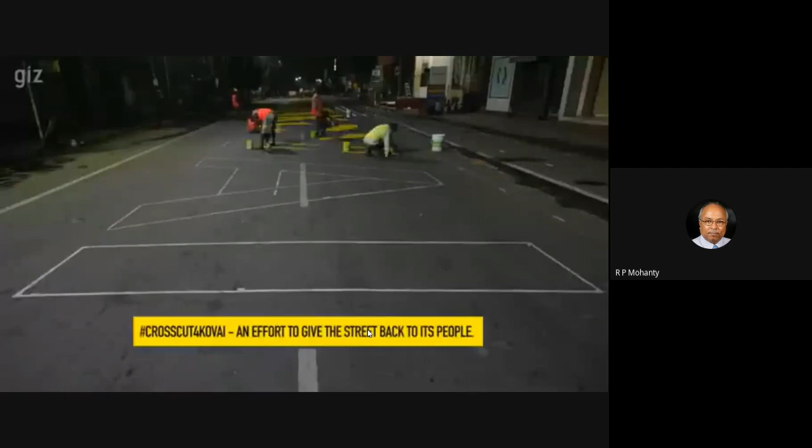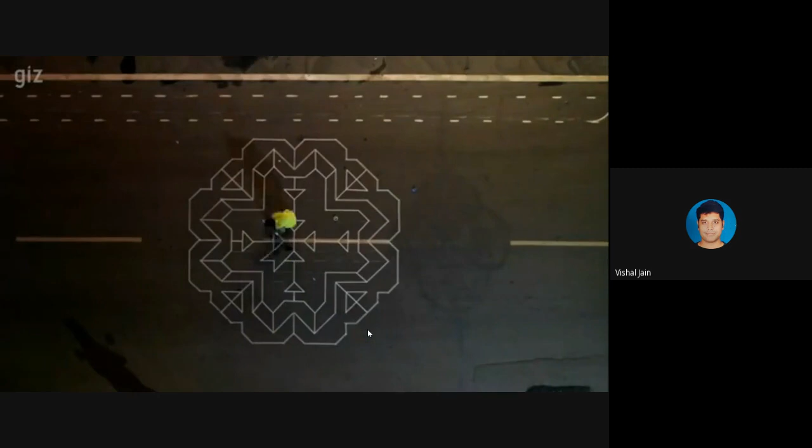And it was a very interesting activity, sir, wherein we partnered with people from all walks of life, be they citizens, planners, designers, engineers, or administrative people. And it was a very good intervention that we tried out. It's present over there even now if anybody wants to visit and check it out.

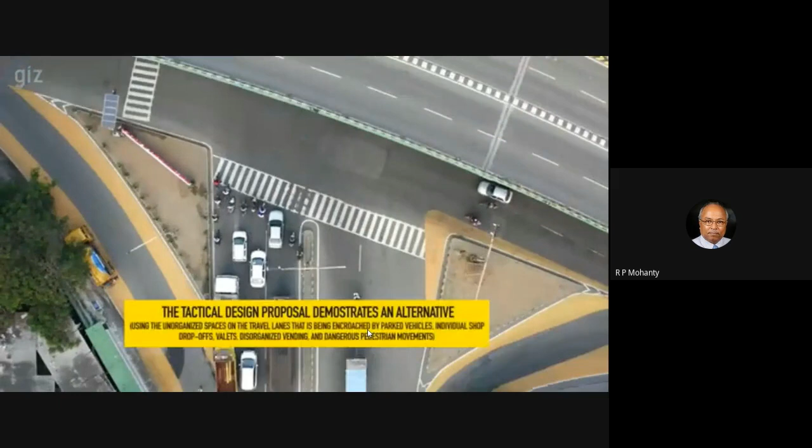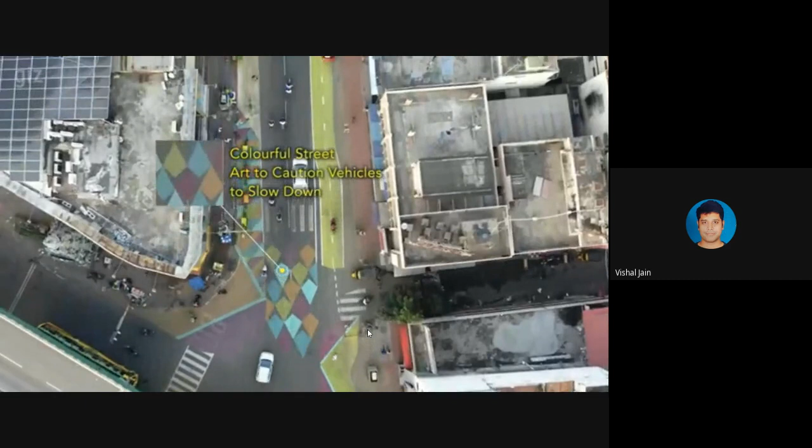So this kind of intervention demonstrated to the citizens what kind of alternatives they could work across, and to the city authorities, these are the kinds of interventions at a very small scale, not a large scale. One kilometer is a very small scale wherein we could try it out. And the success of this was a big instigator for the authorities to actually try this in different places. So at present they are trying it out in different places, and similar things we are trying to do in Bhubaneswar, as sir rightly said at the beginning.

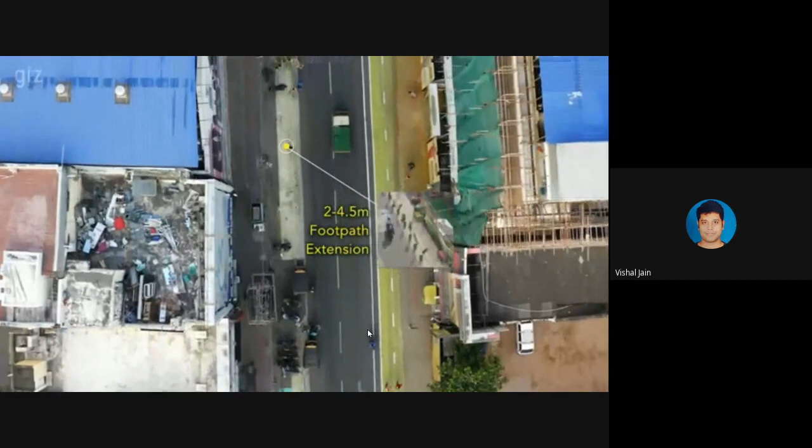We are trying to plan out and design something like this for Ravi Talkies Chhak in Bhubaneswar, and we would really be honored if you could help us by providing constructive criticism and feedback on these. We'll be coming back to you, sir, on that particular topic.

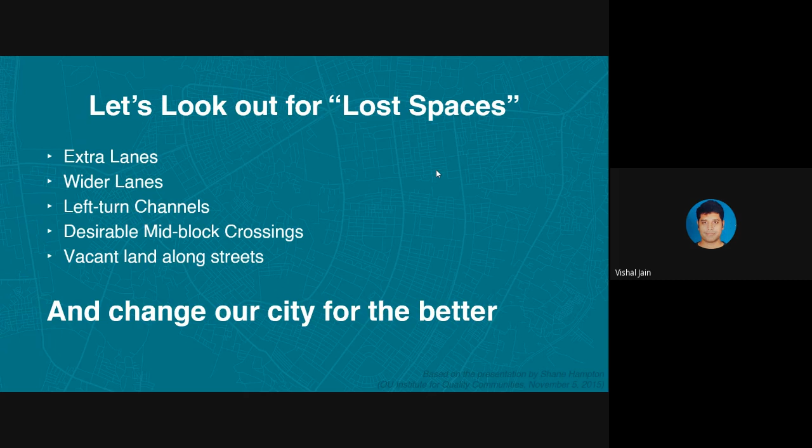And at the end, sir, I would just like to request, let's look out for lost spaces in our cities, be they extra lanes, wider lanes, left turn channels, desirable mid-block crossings where they are required and not present, vacant lands along the streets, and let's come together and change our cities for the better, sir.

Hello? So that is all from my side, sir. I would love to hear your feedback on that.